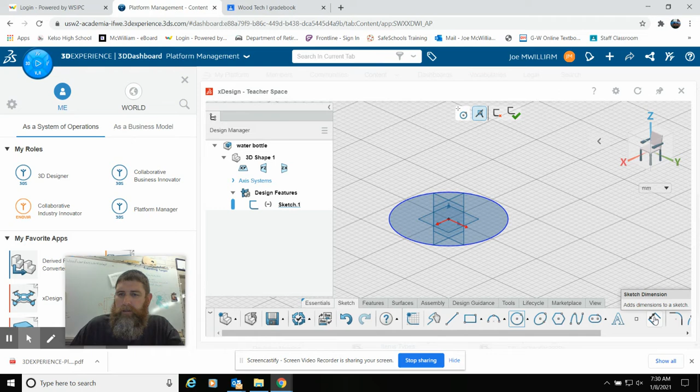How big is that circle? I don't know, I'll move over to that side. And then I'll come over here and say sketch dimension, so I'm going to place a dimension on this thing. It's in millimeters, but before I get really started here, I'm going to change it to inches because I'm American and we think American.

All right, so 7.5, that's a little big. I'm going to go 4 inches, which is still a pretty good sized one. So 4, and now I've got this 4-inch diameter circle.

So yep, that's where you find it right there. That's how you add dimensions.

Okay, so I have a circle. Now I need to make that 3D. I'm going to go into features, and I'm going to extrude this up 0.125, that is an eighth of an inch, which is really thick, but whatever, we're good with that.

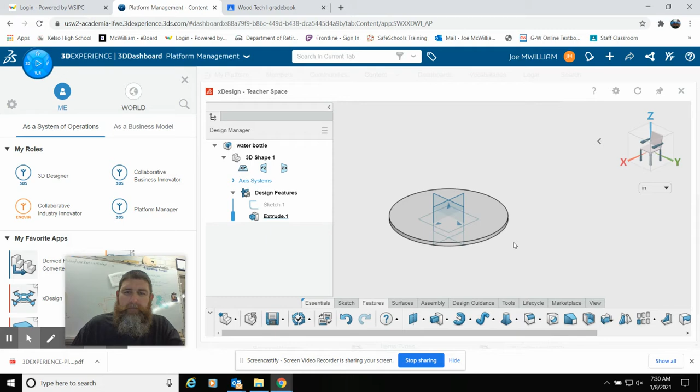And I'm creating a solid. I'm just going to say okay. So now I have this disc, it's an eighth of an inch thick, 4 inches in diameter.

All right, now I'm going to come in and create another sketch, and I'm going to do another circle, and it asks where, what plane. I'm going to click on this top plane, and once again click in the middle, hover over that, and then make this circle the exact same size. Now, you're not going to be able to see it.

But I don't want to come in and say okay and close out the sketch, I'm going to leave that sketch open. And the reason why is when I come into features and again do an extrude, it automatically selects that sketch that's open, so it's just a few more clicks you don't have to do. Now, instead of a solid on this one, I'm going to do a thin feature right here.

Click on thin, and now it still gives me the distance, which I don't want at this distance, 0.125. I want this distance 9 inches, I'm going to make it 9 inches tall.

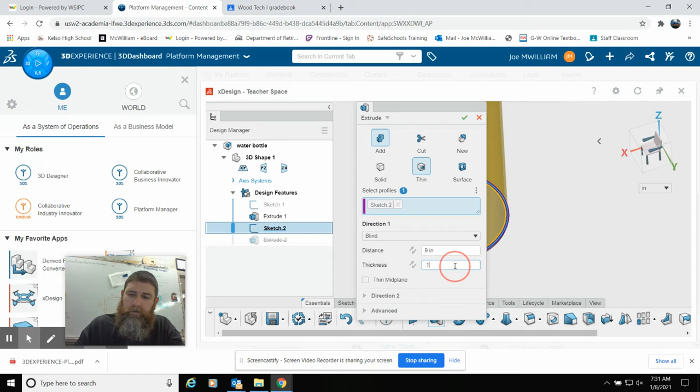And then the thickness, I'm going to make 0.125 because that's the same thickness as my bottom plate. And I'm going to say okay.

So what I have now is this tank, and it doesn't look like it has a bottom, but if you look at it, it does have a bottom. So I've got this tank with a bottom in it.

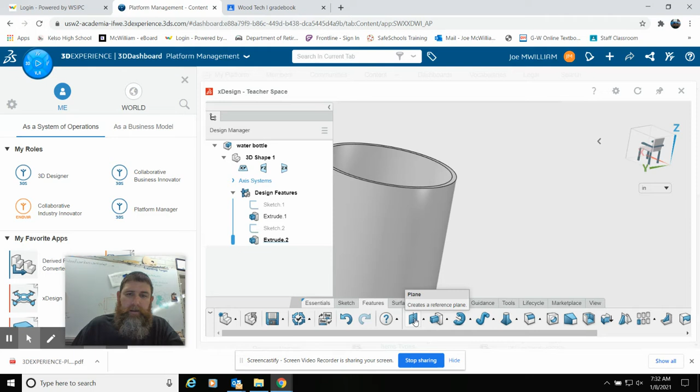That's great, and now I want to kind of do a neck down feature up here because they're not always just straight up, they neck down. So I'm going to create another plane because I can't draw up here in space, so I have to create a plane. And that's this guy right here, it says plane, I'm going to click on that.

And it asks me to select a reference to define the plane, so in other words it's saying where do you want to make this plane. So I am going to select, and I'll zoom in so you can see, I don't want just the outside circle or the inside circle, I want to select the face, this face. It selects both, so I'm going to click on that.

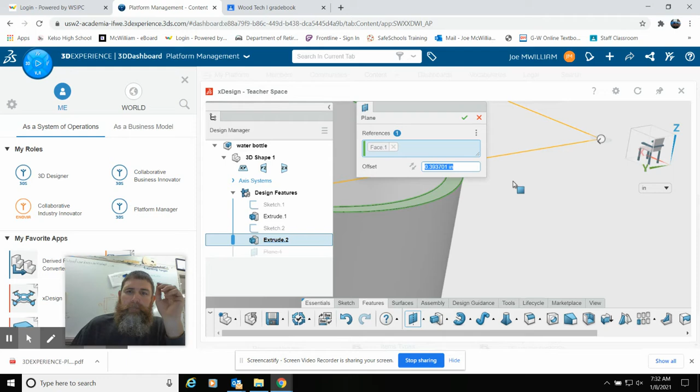And as you can see, there's this plane. Now, an easy way to do it, I'm going to move this over, an easy way to move this plane up, because I want this plane up a little ways. How far up? I don't know. So I can just grab a hold of this with a left click of my mouse and hold it down.

I can grab a hold of this arrow and kind of do it, let's see, maybe taller than that, maybe shorter than that. So you can also just come in here and I'm going to do 1.5 inches.

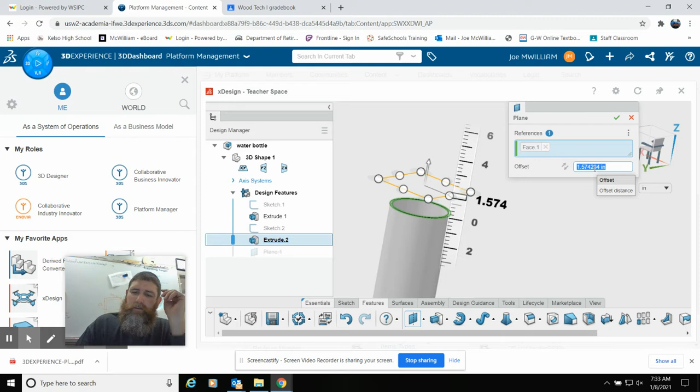Why? Because that sounds about right. And now I have this plane 1.5 inches above the top surface of my water bottle.

And so I can turn it this way, so I'm looking dead down into it. And I'm going to create another, okay, you guessed it, the circle.

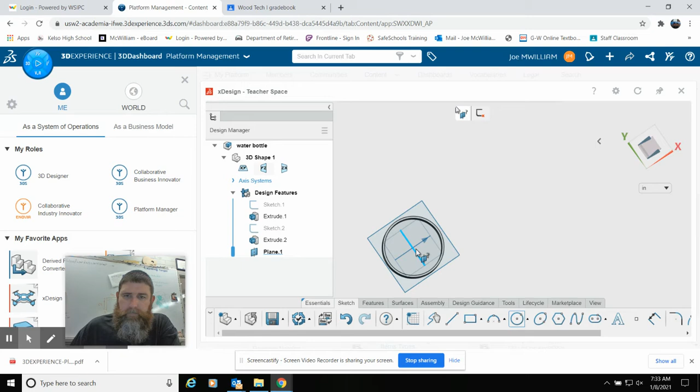Again, I want to select this top plane that I just created and the center of it, and come out and create a circle. How big do I want that? I don't know, let's throw a dimension.

How big is this, what I got? That's 2.03, let's just make it 2. Hit enter, so now I have this 2-inch circle that's situated 1.5 inches above my water bottle.

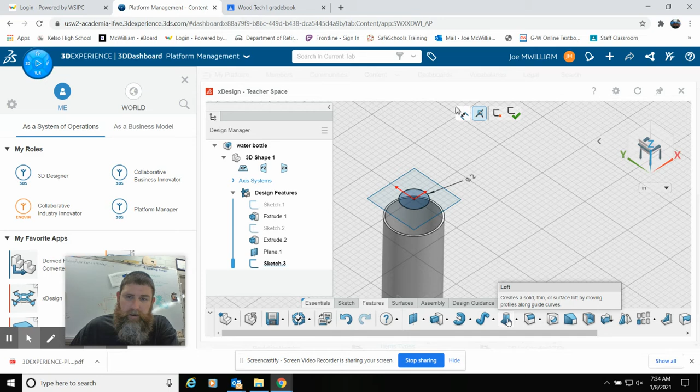All right, after I've got that, now I need to use a new feature, which is kind of cool, except it's really glitchy right now. Hopefully they're continuing to do fixes to this. It's the Loft feature, find it right here, it's in features and then Loft.

Okay, this one's crazy glitchy. You will probably fail 5 times before it finally works, and sometimes it just works. We'll see. So again, I don't want to create a solid, I want to create a thin feature. And now it says select the sections to loft between.

Here's what's important: you want to select the outside edge of this circle. Ta-da, so I'll call that edge 1. And you want to select this circle, edge 2. And it already says there's an error. You didn't do something right. Well, oddly enough, we did.

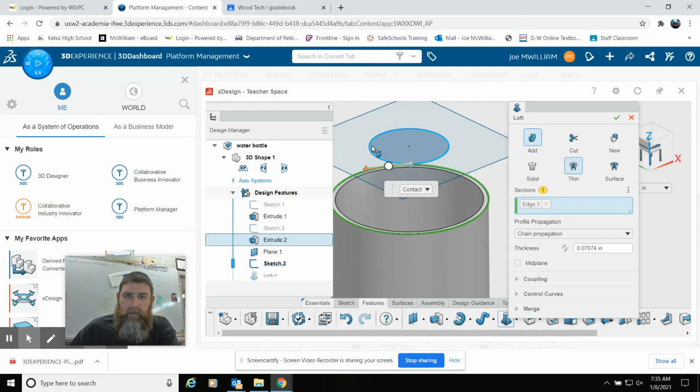It doesn't like it. I'm kind of glad this is happening, because we're going to have to redo this a bunch of times before it finally goes, oh yeah, what you're doing is fine. So keep selecting those two and see, I selected the same two in the same way, and finally it goes, oh yeah, that's fine. Now I would still be kind of shocked if I click OK and it works.

So I'm going to come in here and decide how thick I want it. 0.125, make it all the same thickness, and say okay. And it says, yeah, you can't do that. It doesn't work, can't do that. features before continuing your design work. Bloody, bloody, bloody. So here's what you do.

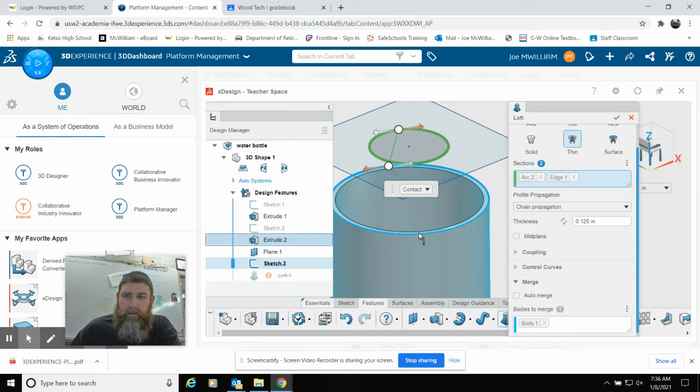I'm going to come over here where it says Loft 1, click on it, and then click Edit. Edit the feature. Now what did we do wrong last time? Nothing, why is it not working? I don't know. So I'm going to unclick both of those again, one more time. I'll click this one and that one, and you can see it's not working at all. Oh, you did something horrible. Thank you, Captain Obvious. We'll try it again.

Hey, it worked that time because I clicked it the exact same way. All right, we're gonna say okay again, and once again it says no, you can't do that. So we're gonna do that a few times until it finally decides, oh yeah, you're doing the exact same way every time, and it should just work. We'll see.

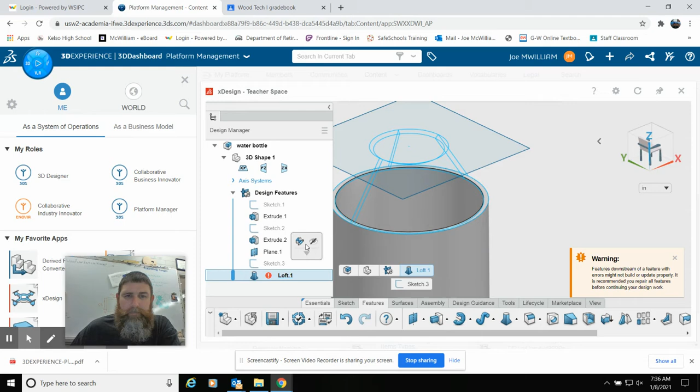Click on okay. No, it's not gonna do it. All right, this is where it gets old and a little tiring. And that edge, yep, it says it's just fine. This is how I'm going to build it. No, it's not going to. We'll call it tangent, see what it does. No, can't do it.

We'll just keep trying different things. Although it's cool, I like that tangent one better. Curvature, ooh, that's even cooler. Let's go with that. No. It's supposed to repair all the features. Oh, I'd be so glad to.

Let's do mid plane. It doesn't like that, it's like no, you can't do mid plane. There's a lot of stuff I could try, and I know none of it's going to work. Tangent propagation, oh that'll make a difference. Let's see, did it work? No, it didn't, still not. So yeah, usually you just have to try it 3 or 4 times and then it works.

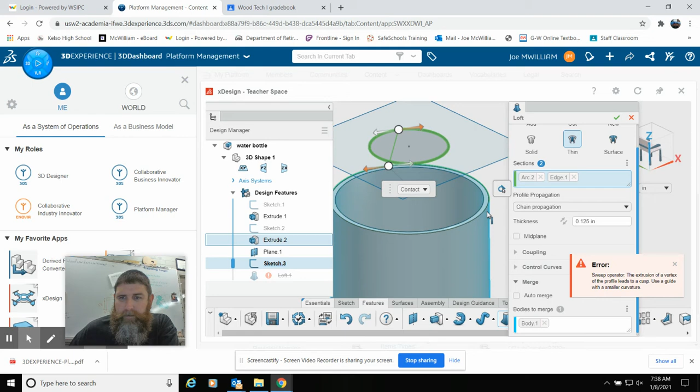This one's like, no. All right, let's select the entire thing, let's select the outside again. Edge 1, no, won't even try it, can't do it. All right, I'm pretty over this by now. Let's try it again. All right, there's a straight one, let's see if that one works. No, doesn't work.

Okay, let's try making a solid, although I don't think it'll matter. Let's try that, no, doesn't work. Let's try a thin feature. Hey, what a great idea, thanks. Let's try moving these. No, there's nothing to move, can't move it because it is round to a round, which is a very simple thing to do.

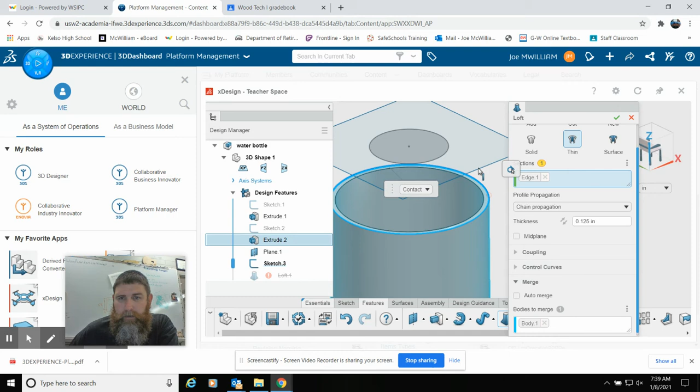And let's click OK again. No, it's not going to work. All right, well, we are about to run out of options. Edge 1, edge 2, can't do it. It is not going to work today.

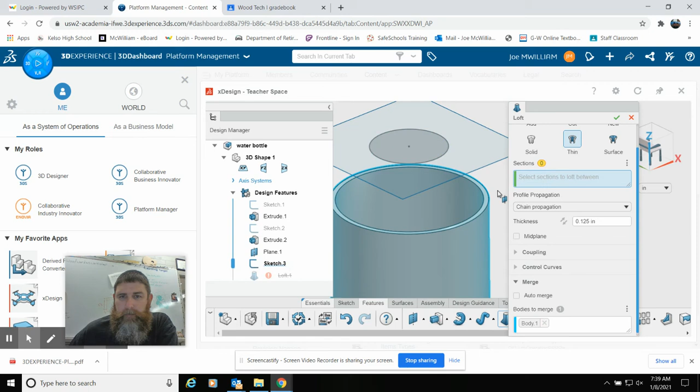No. Edit feature. Then edge 1, edge 2. Contact, it's a nice round top, looks kind of cool.

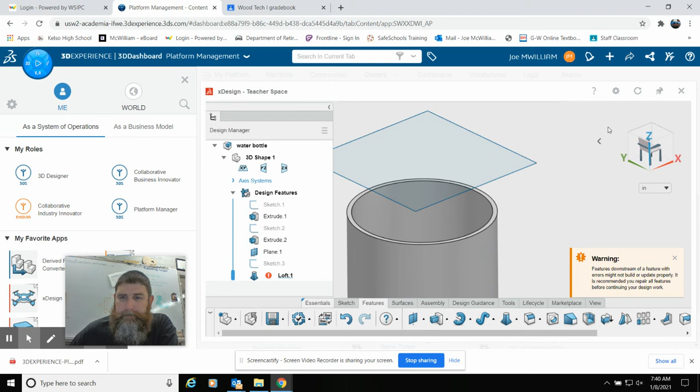Let's try none. Nope, it's refusing, refuses to work ever. Let's do a surface, maybe you can do the math on the surface. There we go, surface worked. Who knows, right? You never know.

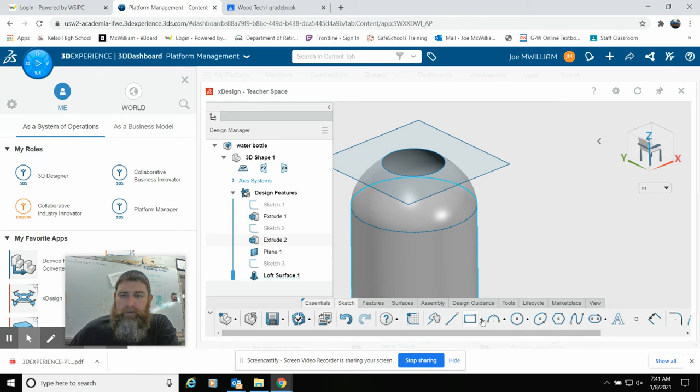Okay, so now I'm going to go back into Sketch. Before I do—no, you know what, I don't need to make another plane. I could make another plane up higher, but at this point I'm just going to go into Sketch. I'm going to draw a circle, turn this over so I'm looking right down the middle, click on this top plane that I just made, and make this one the exact same size as the hole up on top.

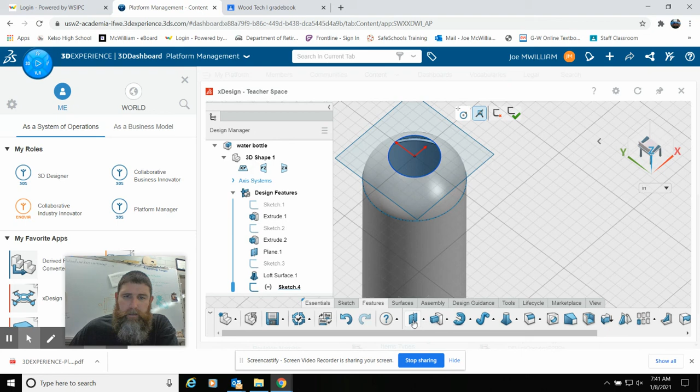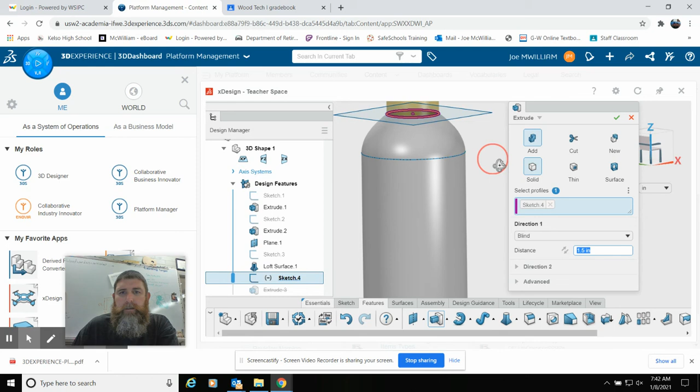All right, now I'm going to leave that sketch open, and I'm going to go into features and increase this in height. So I'll add a solid, sketch, blind, and I want to go up in distance—1.5 inches. Once I go up 1.5 inches, I will click on OK. And now I have my water bottle top.

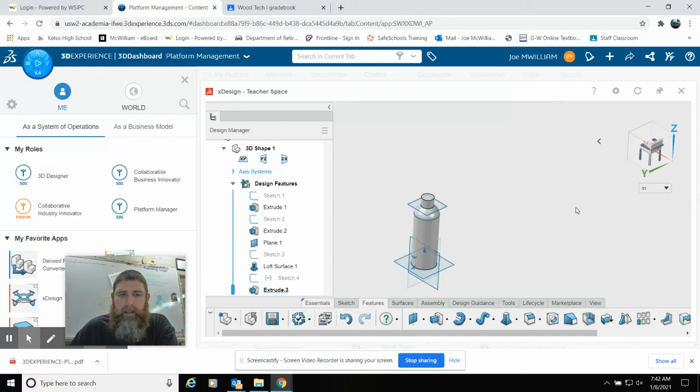As you can see, the whole loft feature is incredibly glitchy and very problematic. So hopefully you guys get it and see that. All right, thanks guys.